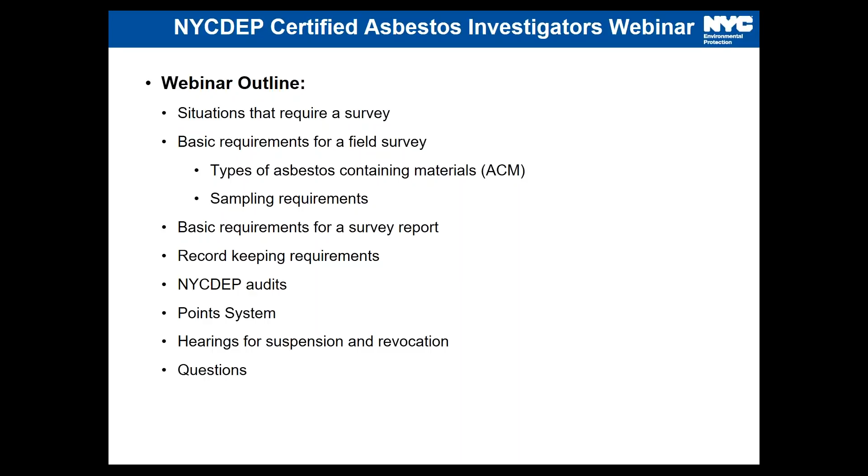As said, we'll hold all questions until the end so we can move on with the presentation. Situations that require a survey: typically you'll file an asbestos assessment report if a job requires a building department survey for any kind of work the building department requires. Prior to conducting the survey, we think the CAI should review building records.

We say that because we find a lot of times CAIs fill out a report and say they didn't know the building had asbestos, or didn't know there was a pipe chase, or didn't know there was vinyl flooring tile somewhere. So take a look at the building records, which you might get from the owner. Ask the owner: have we done tile work here? In some buildings you'll find five layers of roofing material, or five layers of floor tiles, and an investigator will say they didn't expect so many layers.

So we say, talk to the owner or whoever might be able to identify what might be present. This is only a cursory survey, not your actual survey, but it helps guide you in that process.

Contact the building owner and determine the exact scope of work. Many times people say they weren't sure what the scope of work was, or the owner didn't tell them. If you don't know, ask the owner specifically what the scope of work is, what they expect to be done. If the owner has to give it to you in writing, let him give it to you in writing to protect yourself. Many times CAIs come and say the owner told them it was the first floor, but then they were doing work in the basement, or something different. Protect yourself, because we don't want to issue you a violation unnecessarily.

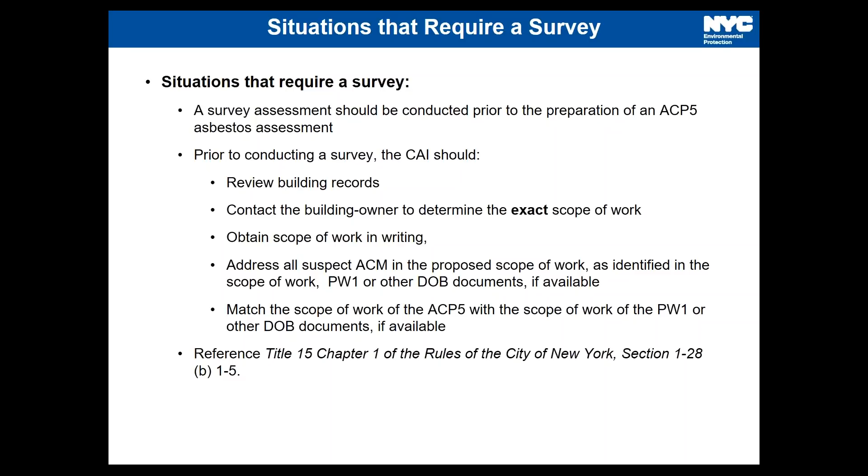In that survey, it said determine the type and quantity of ACM present. So what we want you to do is when you do that assessment, take a look around the building, related to the scope of work. When we do an inspection and audit for any of your jobs, we actually look up the scope of work you identified and check that area. Similarly, we don't expect you to do an assessment of the entire building if the work is only in the basement, it's only for that work area. Do an assessment of all the asbestos present in that work area.

One thing you will see is that many investigators say, well, it was behind the wall, and that's a typical excuse. And the owner told us don't break the wall. Well, if he tells you don't break the wall and he hired you to tell if there's asbestos there, you have to break the wall. Otherwise, you can't take the job. It's as simple as that.

This will require destructive testing. You cannot come and say, well, he told me don't break the wall, so I'm going to assume asbestos was behind the wall, just by saying I'm going to assume everything is asbestos. We want you, if you have to open the wall to make that determination, or if there's records that say the pipe chase runs in this location, you can make an assessment that may have 10 feet of pipe TSI or something in there, then do that.

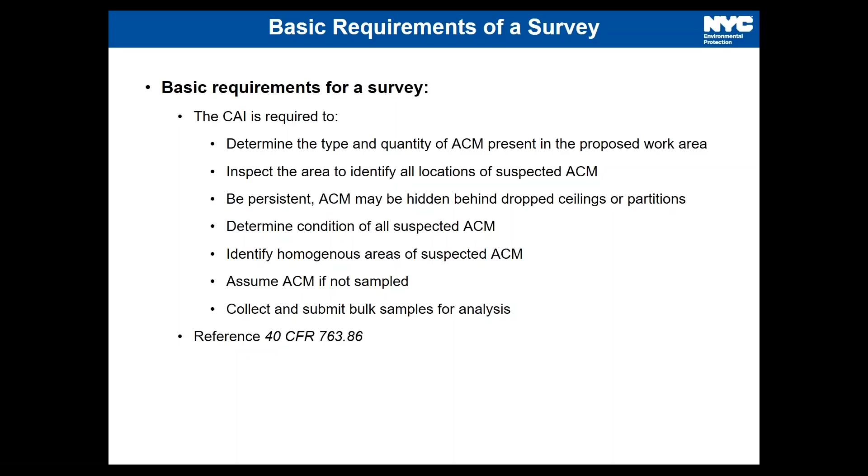Is it present in buildings? Some more references here - EPA references. ACM is identified in 3 types: troweled or sprayed-on, TSI (thermal system insulation), and other miscellaneous types. We have some examples - for example, floor tiles, TSI would be on pipes, boilers, and surfacing material.

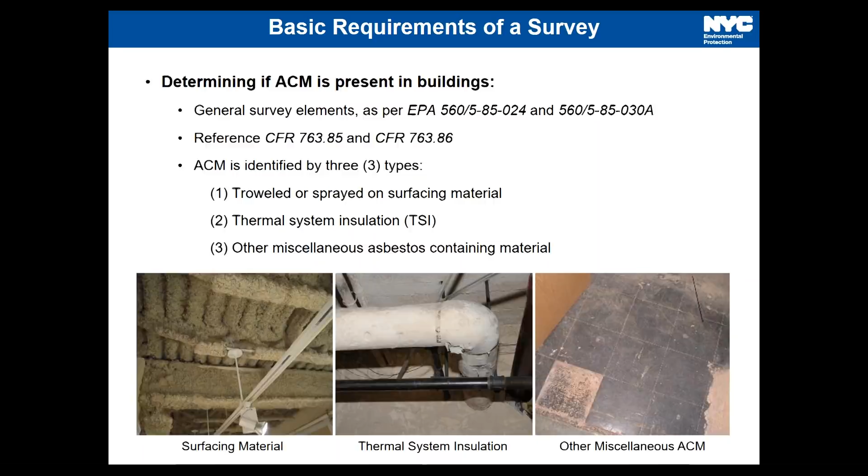Spray or troweled on, determine the location of all the material. Here we say you need to visually observe the material. One of the problems we have with some of these ACP5 reports is there's a lot of assumption that everything is asbestos.

We put this in red here, this part that says must be visually observed, because we want to make sure that you see that material.

Many times we have found that CAIs say everything is asbestos. They just assume the entire building is asbestos. I'm serious, we get a lot of fives where it only says assumed asbestos, and then the owner takes this 5 and runs with it saying we could do a demolition. But you're doing the owner a disservice by assuming everything is asbestos. Then he didn't have to hire you. Your job would have been to do a thorough inspection where you actually see asbestos.

So again, there's that position where it was behind the wall. I'm just going to assume everything is behind the wall, and sometimes there's nothing behind the wall, right? That doesn't help the owner.

Quantify the ACM, and here you need to say it's 10 square feet, 25 linear feet. Collect core samples to be analyzed, and we specify core samples here because, as I mentioned to you, you will see floor tiles.

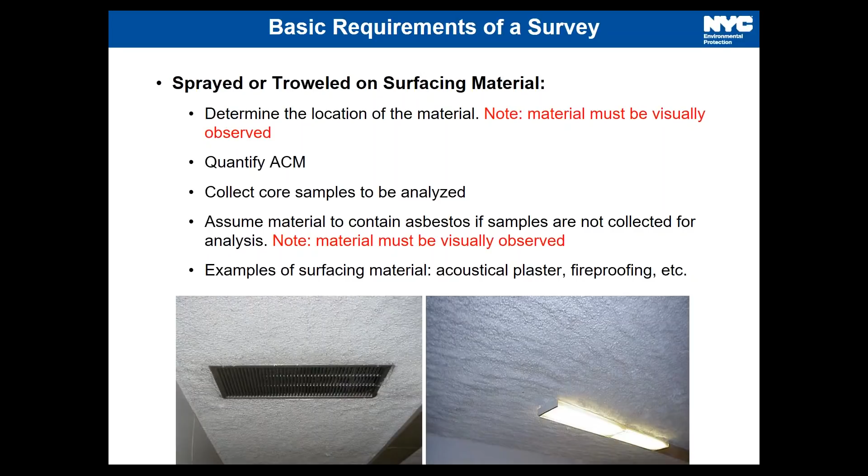Examples of surfacing material here, and then you see some examples here. TSI, so examples of TSI will be what you find on pipe, on piping, heating pipes, boiler insulation.

Determine the condition again - in your report, you are required to say what is the condition of this material. Why is that important to you? Sometimes we go to a demolition job site where the owner didn't file the ACP5 yet, or he may or may not have filed the 5, but during that demolition, the owner unknowingly hired a demolition contractor who starts breaking down the walls. There's pipes in a pipe chase that is in bad condition that starts falling apart when the demolition is taking place. So now ACM gets disturbed because it's all over the ground.

It was not in a good condition. So if you identify that, it helps protect you and protect the owner in some way, because you had identified this material as being damaged, falling apart. It's on the ground, it's loose.

Take bulk samples as necessary. Again, you can't go wrong taking bulk samples. If samples - again, we're going to assume it's asbestos here.

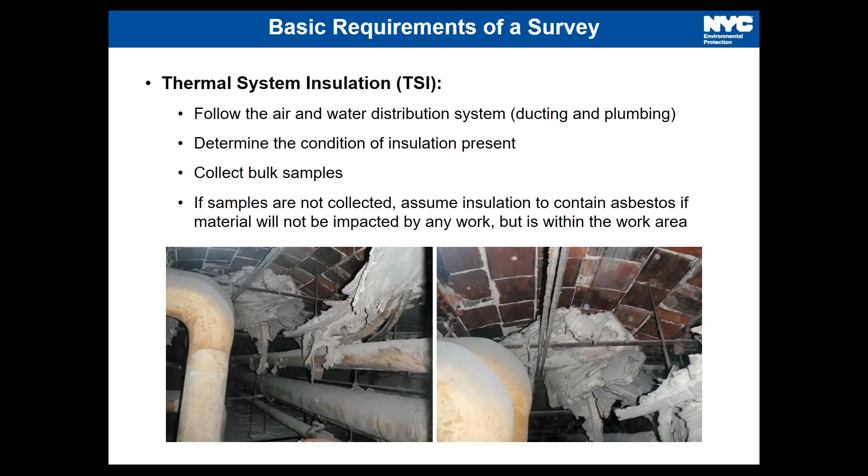Other asbestos containing material, document the presence and locations of the material. Again, you need to specifically say where you took samples from. In the EPA guidance, it says you need to have these locations uniquely identified so that there's no way that somebody could misconstrue where the samples were taken from.

Examples again here, you see roofing material, mastic.

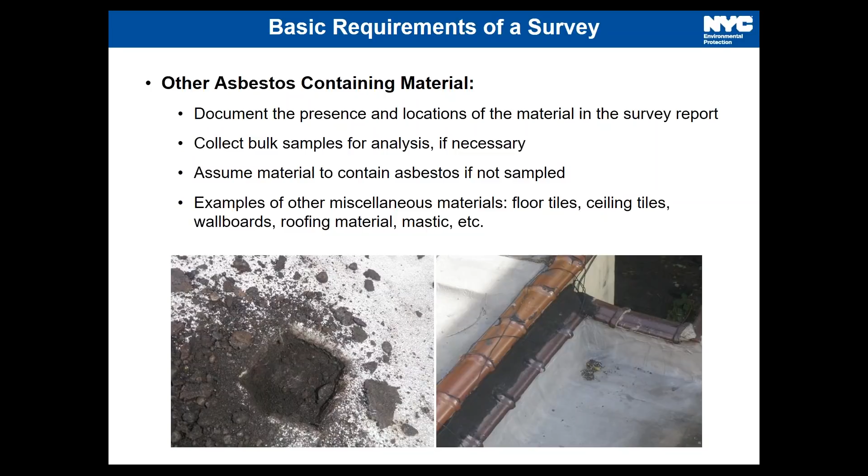The only thing is, based from our experience - and I'm saying DEP experience with our staff in the field - if I'm doing roofing material, for example, or any sort of patching materials, troweled-on material, that material isn't in itself homogeneous. So you may get 1 hit here, and you took 9 samples, 8 negative, 1 positive. So you want to be able to take samples that is representative.

Don't say I'm going to try to go with the minimum samples - 3 samples for 1,000 square feet area. If you think about it really for roofing material, that's not going to cut it, right? Because roofing material, flashing, for example, we find many times out of a roof that said it was positive for asbestos, we may take 10 samples, I'll get 5 that is a hit.

Sometimes as a CAI, you may take 3 samples and those came out negative because you went with a minimum. Then we go out and take samples - I'm going to take 10 samples at least for roofing material because I know for a fact it's not homogeneous. And then I get 2 or 3 positive. So if you're doing roofing, this kind of stuff here for sampling, try not to go with a minimum because of those facts I told you. Try and do some more.

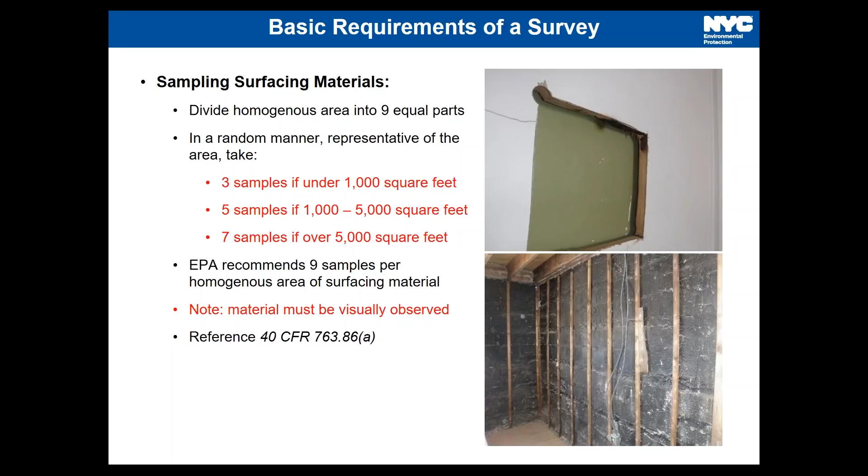So again, you want to divide this area into 9 equal parts, and we have a slide coming up with that. This would be something like this here. So what this is saying is, this is only a schematic - I have a whole bunch of different homogeneous areas.

Raj, I know you want to go ahead - this is Raj Rajesha, one of my supervisors. You want to go ahead?

Yeah, this is the grid system, and this makes sense. But a lot of times you go out in the field and talk to the building owner - yeah, the guy came and took a sample from over there - and you have 1,000 to 2,000 square feet of fireproofing material. One of the reasons for using this grid system is because over the years the building owner might have done work, either legally or illegally, put on new fireproofing material, but there's still existing material there, in this area, and that area, and that area over there. So if you use this grid system and take samples randomly, based on the 3-5-7 rule, your chances of getting one of those areas is very high.

And to just come and say, okay, one here, one here, one here - like Charles was saying, even with roofing material, I would use a grid system because the owner might patch over there and patch over there over the years, and got material here, over there. If you use that grid system, your chances of hitting one of those spots increases.

Right? Core samples, because of multiple layers - the old fireproofing might still be there. If you just take off a little piece, you get a new one. The work starts, we show up, we got everything on the floor, we collected bulk samples, it's positive. A lot of times you've seen that.

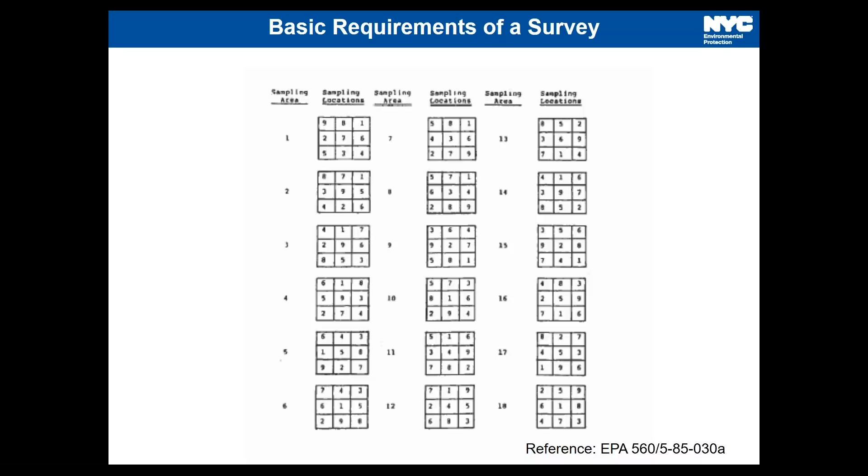So you want to make sure you utilize this grid system where in your mind - now we don't expect you to get a measuring tape and measure and divide it equally, in your mind divide the area. You could have an irregular area, for example - yeah, this is an irregular area. Divide it up, and you try to take your samples in the middle of the squares. So you get that system going, and it's consistent, and you should be good.

Now, the reason why they have these numbers like this here is basically to confuse the analyst. No, I'm serious - the intent, if you're wondering, is to confuse the analyst in the sense that if they had it in sequence, 1, 2, 3, 4, 5, 6, 7, the analyst might assume in his head, psychologically, if number 1 was positive and they were taken in order, number 2 might be positive too. As you know, with asbestos bulk sampling there's a lot of subjectivity in the analytical process - I would assume in my head, if this is positive, the next one's going to be positive. The difference between 1% and 1.1% isn't that much. So what the EPA did is come up with this and say, let's mix these numbers up. So when you sample, don't do it in any particular order, so that the people in the lab cannot, or hopefully wouldn't, say the one next to the next one is positive. That's the intent.

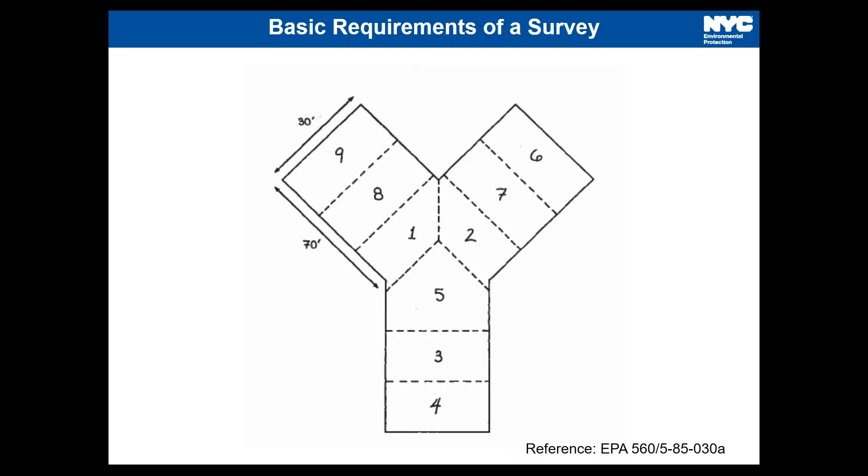Sampling thermal insulation here—again, there's guidance here, 3 samples for TSI, those are minimums. The thing with TSI is most of the time we know for sure, almost 100%, it's going to be positive. That's most people's take.

Those things are easy to identify. If you have enough experience in the business, when we see pipe insulation, we could tell it's going to be positive. So we say take 3 samples, patch areas 1 sample, for elbows and T's at least 2 samples, or in a manner sufficient to determine. You will see that phrase used in most guidance documents and regulations. It's basically saying you need to use your experience, skills, knowledge, ability, whatever, to take the right amount of samples.

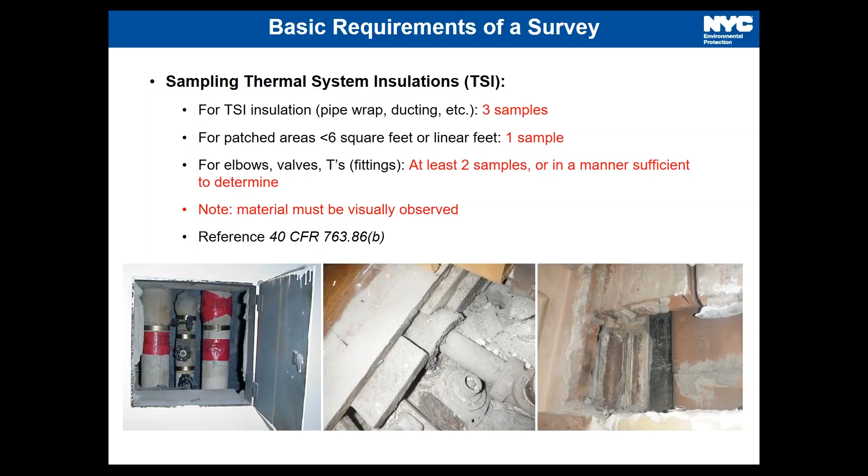Again, you'll see here we're saying you should visually see the material. Sampling other miscellaneous material, at least 2 samples, or in a manner sufficient to determine.

As you see here, sometimes you have to take off some outer covering. For example, siding is a good one. We see a lot of times there's aluminum siding—the investigator looks at the aluminum and runs with aluminum. You have to take a look inside. I know that sounds basic, but from our experience, a lot of people just look at the outside material, that first coat, that first layer.

This could happen sometimes: if you have floor tiles and it's all messed up, one of the things I may want to do is put a layer of flooring, plywood, to even it up. Then somebody starts demolition and everything becomes exposed, right?

This is why sometimes talking to that homeowner might be helpful. Because in this case, if this is the VAT here and I have a sheet of plywood over it, you're going to come back with negative, right? That's understandable that you would come back with that, but we're saying you need to be very thorough in your investigation.

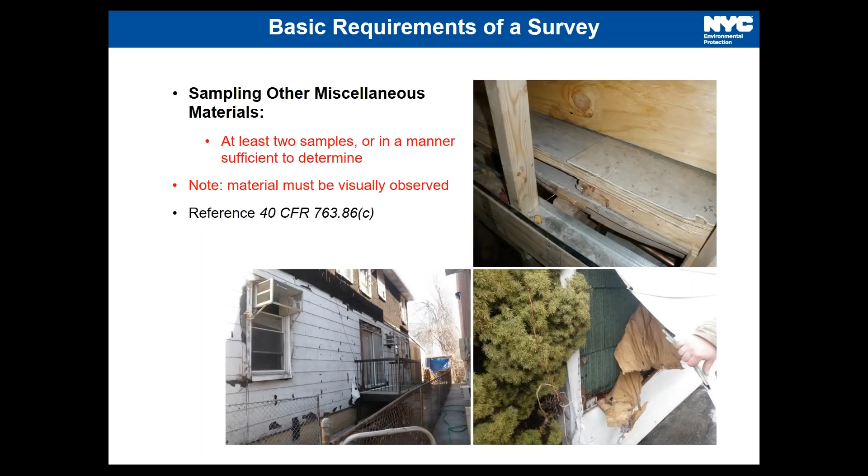Basic requirements for a field survey report: that report you prepare should include the condition of the work area during the time of investigation, a blueprint, diagram, drawing, or written description of the building.

So it requires work—you will have to take the time. I can tell you from my personal experience doing audits, I've gone to many office audits, and while I'm there the CAI is writing up the building description for an inspection he did a year ago. It happens. You need to do this right away, and it needs to be that detailed.

A clear and defined scope of work—again, we are saying make sure you get that scope of work. Any assumed material should be clearly identified. Investigation-specific information, such as building address and building owner's information.

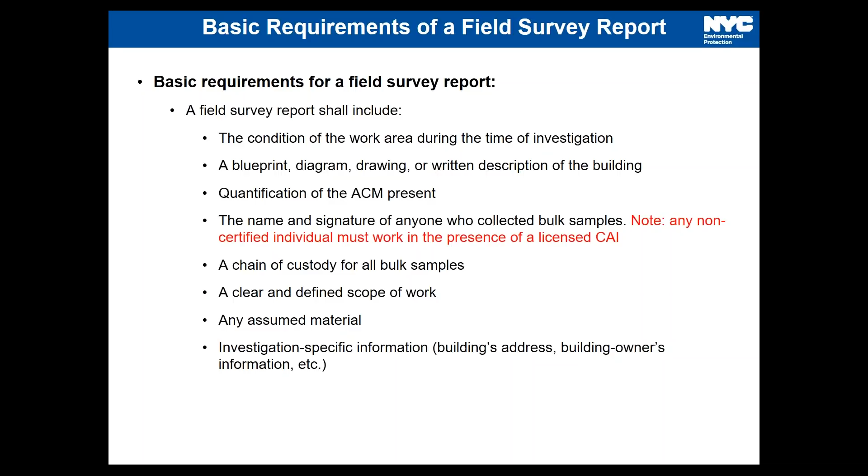So the blueprint, diagram, drawing, written description—you want to have a nice description so that if I went to that location, I could look at your drawing and say the investigator took samples at this location and that location. We've had many instances where we had to show the CAI where we sampled, and the CAI had no clue where he or she sampled. So if you have that description, that drawing, and we came to you, you could say, look, this is where I sampled. It makes it easier for everyone.

It's for your protection also. Again, our intent here is to help you do the job better, or to understand what we look for, or what is expected of you.

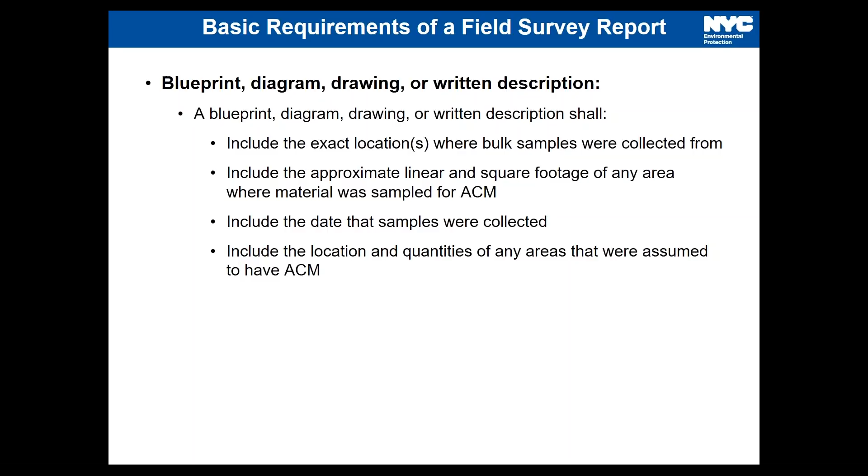Include the location and quantities of any areas that were assumed to have ACM. The chain of custody—and this requirement is a basic requirement used not just for asbestos investigation, but in any criminal court, anything. When you have a chain of custody, you should have some basic information.

Name and address, date and time samples were collected—extremely important. Why? Because sometimes we may see a chain of custody that has a different time than the time you did the investigation, right? We check for all these things when we do our audits. So if those things don't match up, there's a problem. And if you do these things while you're doing the sampling, it would make it a lot easier.

The printed name and signature of each person collecting bulk samples, location where the samples were collected, a unique identification number. We do see chain of custody come up where the numbers, you could tell they were totally messed up, incorrect. Maybe somebody gets those things afterwards. So you want to make sure any sampling procedure or chain of custody you're using will have a unique identification number.

That's standard practice. Description of the samples, the date and time the bulk samples were relinquished for analysis. Again, these things, when we do an audit, we will check those things. So you need to make sure that these things are in sync with what you did when you were out in the field. The printed name and signatures of each person relinquishing the samples. If someone took it to the lab and it wasn't you, that person's name should be on it also.

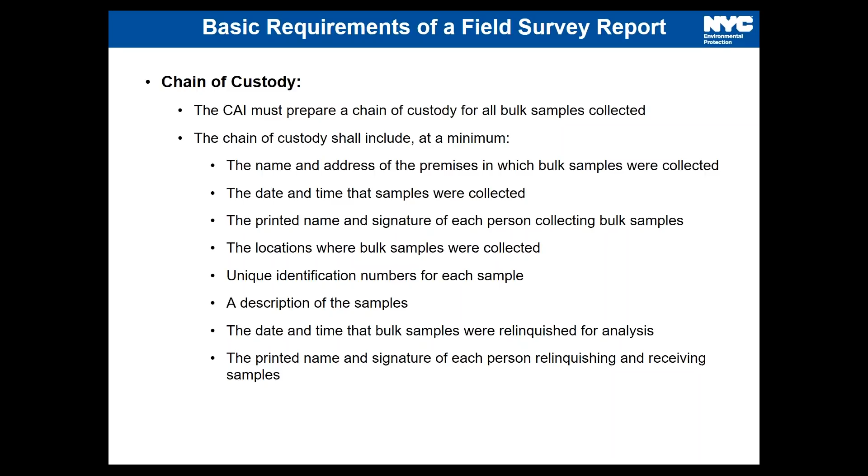Record keeping requirements. The CAI is required to maintain a permanent record, and that record is for at least 30 years. The compiling of records shall be done prior to the preparation of an ACP 5 or 7. A survey report shall be prepared at the conclusion of the survey hazard assessment. It should include the premises, location, and so on.

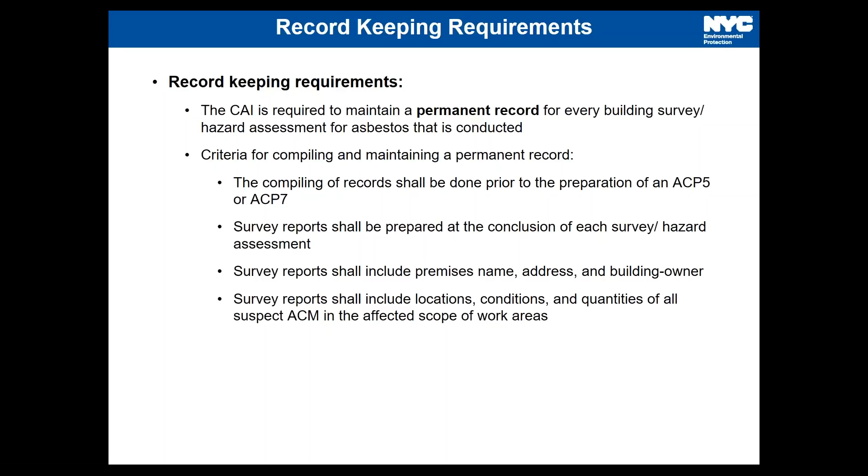The CAI is required to indicate all instances in which work was performed by a non-certified person. Again, keep your records for 30 years. These records should be available during the normal course of the DEP inspection. So if we show up at your location and you're there, they should be available.

Many times the CAI says we try to be reasonable and we tell you we're going to come to your location when it's convenient for you. We don't have to do that. We do it as a courtesy because we know you all are busy, just like we are busy, and we tell you when it's convenient for you, and then you give us 2 weeks, and we try to set up something in 2 weeks, right?

I've gone to places where, and I'll give you an example. I've told a guy, he said 2 weeks, and he's like, no, I need more than 2 weeks, right? And I'm in my head thinking all sorts of stuff that I shouldn't think. He asked for another 2 weeks. I go there, and while I'm sitting there, the guy is still writing up, and he's like, listen, I didn't get a chance to finish writing up all of these reports. He's telling me that, right?

Don't make it that difficult for yourself when we do an audit. And I say, I give the guy time. It didn't help him because he never had anything written up, right? You have to go through the process. But I'm saying to you, don't think that we don't, when we do our audits again, we try our best to give you the benefit of the doubt. We try to work with you.

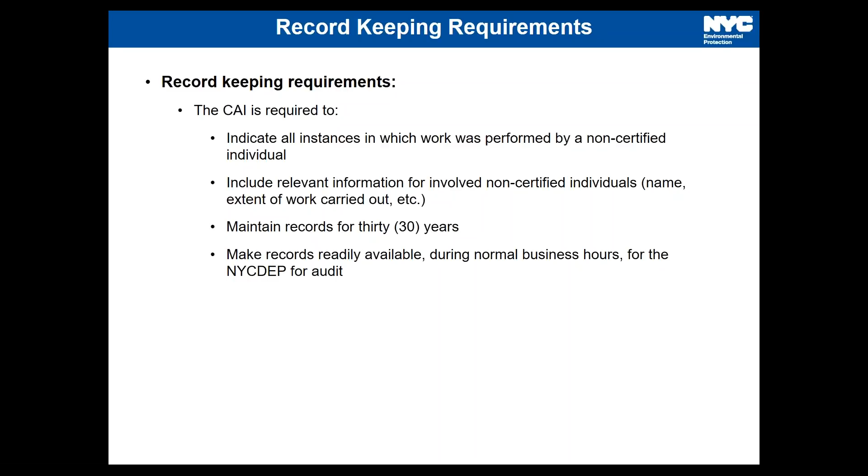So you all know that you might have gone through audits, field, office, time to time you hear modifications, amended ACP 5. We randomly pick based on number of filings. If you're a high filer, there's a chance that you're going to get audited multiple times within a year. That's a possibility. And then based on field audits, complaints that we go to, pretty much a lot of the complaints we go to all construction sites, definitely an ACP 5 is involved. So we look for, there's a field audit right there.

All right, so any issues, missed material, that's going to add up. That's going to be a trigger point. So it's going to go on scheduling. So those are the bases.

So scope of work is very key. It's better to understand. If I'm me, I would get the preliminary permit. I mean, a permit application, I will go through it. Even if it's a drawing, I would like to get a drawing before I go do my survey. That's the way I would do it if I'm a CAI.

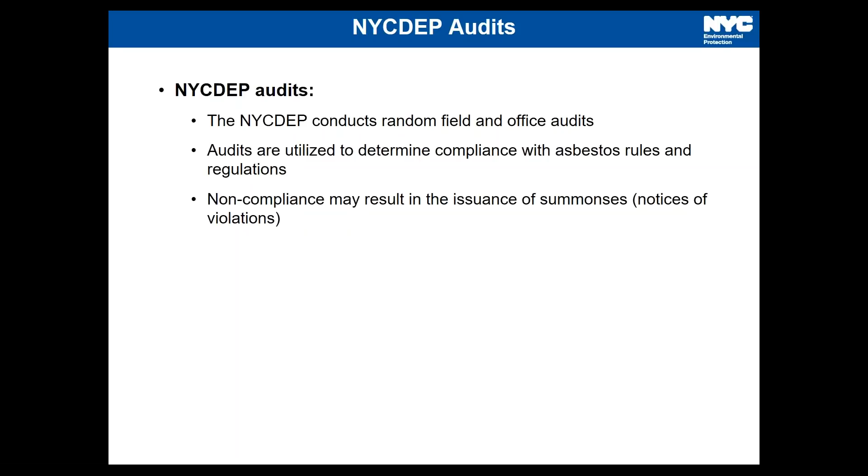As you see, the most serious violations are 5 points. 101E, making a false statement - you walk into a building and floor tiles, 9 by 9, are looking at you, and the CAI didn't mention anything. The building is going for full demolition, right? That's 5 points. 16A3, you missed material, didn't take enough samples - one sample of plaster, one sample of PSI. Those are all 16A3, one of the serious violations.

4 points, the next level, failure to maintain a permanent record - you go there, there's no records. Failure to indicate - you have instances where people assisted you in the survey, but there's no mention of it, but we catch it in the chain of custody. Somebody did the sampling, but that's not you, and it's not there. It should be in the survey record.

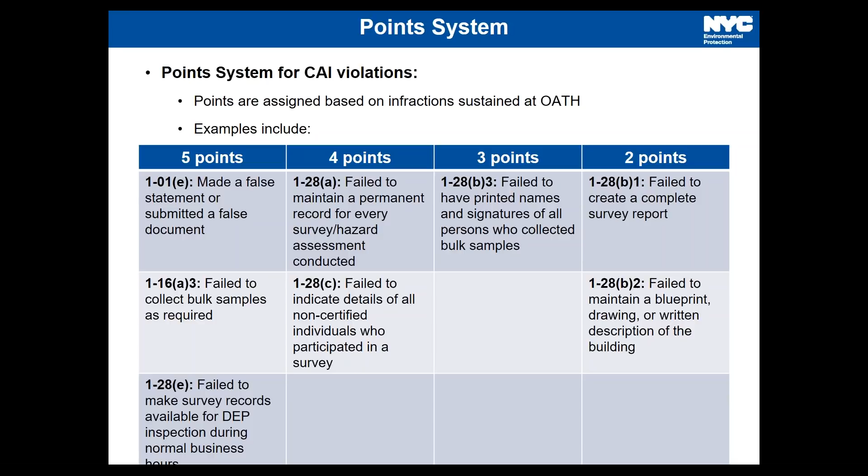Based on this point system, we will schedule a hearing for either suspension or revocation. Mind you, even though we have this system, if for some reason we go to a location and I walk into that location and there's asbestos looking at me everywhere, it is possible we may look at it as what we refer to as an egregious type situation, and we'd probably say this CAI couldn't have even missed this. It is possible we bring you in for a hearing - not a DCB, but a suspension or revocation hearing - because there is something drastically wrong there, and it happens many times.

We go to job sites where the CAI signed off a clean bill of health, and there's asbestos there that there's no way you could have missed - I'm talking pipe insulation, boiler insulation, and everything else.

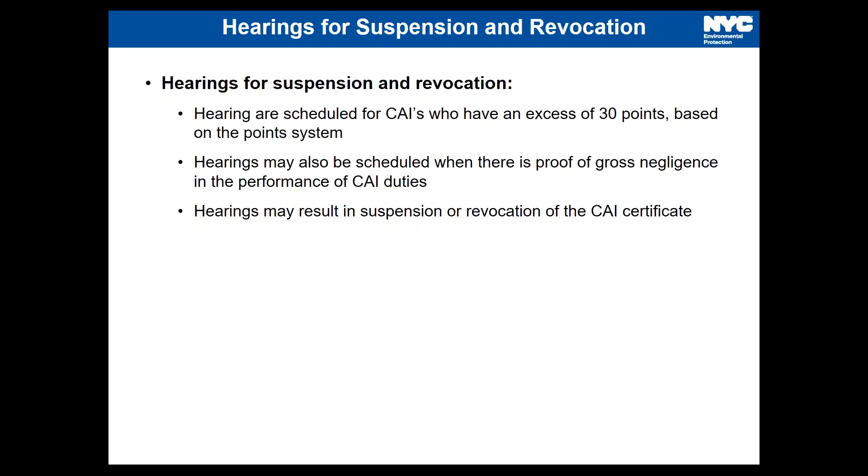That's the end of this very simple, basic presentation here. So basically, the downside to non-sampling is going to cost a lot of money. We have seen a lot of single-family owners paying tens of thousands of dollars in fines.